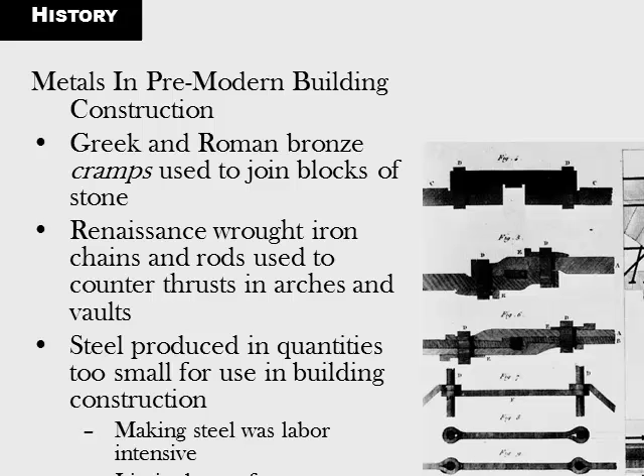Of course, steel is not a modern material. It was used in ancient times, and y'all can read through that. It started wide use, or mass use, in the 1700s. That picture on the bottom right is the Crystal Palace, which is a very famous structure. And then, of course, the Eiffel Tower was done in 1889.

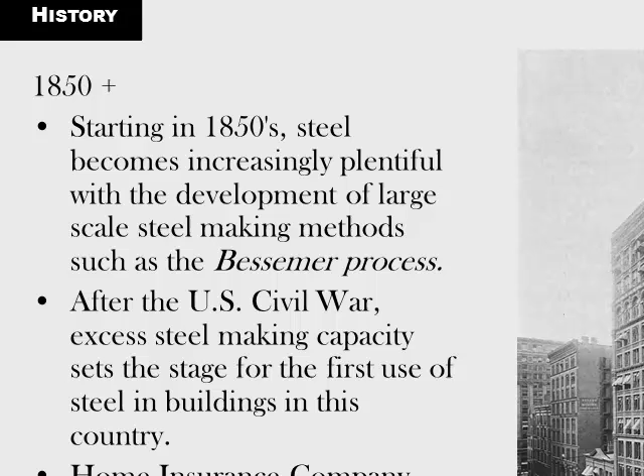With the Bessemer process, that's what made it start being widely used as far as structure. It's one, and then it talks about the modern use. And then it gets into the materials, what's in steel, and the differences between the different types.

You got cast iron, wrought iron, and steel. Cast iron typically is 2 to 4% carbon. Wrought iron has little or no carbon. Strong in tension, but weak in compression. It's easily shaped. Any of you ever seen like cast iron furniture in a yard with the little curly cues and stuff? Or wrought iron, I think that's typically what it is. And that's because it's easily shaped, but it is not very strong.

You'd think you could just beat it with a baseball bat and it'd be fine, but we had some, and in a move it just crumbled because of the weight that the movers stacked on top of it. So it looks strong, but it's not. And then there's steel, which is less than 2% carbon, strong in both tension and compression. You understand the difference between tension and compression? Tension pulls something, compression presses it.

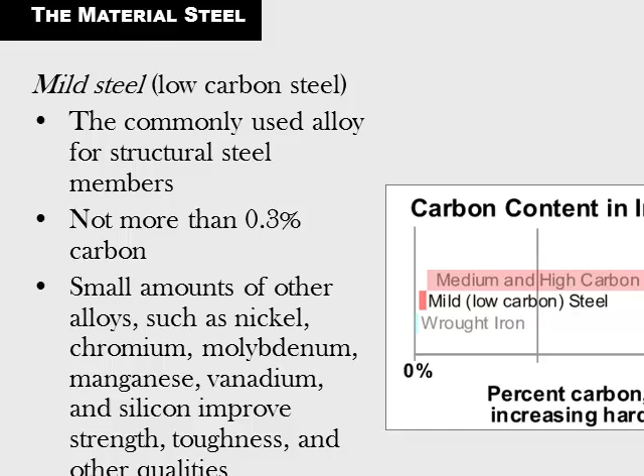The reason steel and concrete work well together is because concrete is very strong in compression and steel is very strong in tension. So together they make a very strong unit, and that's why we reinforce concrete with steel. Talks about other alloys and things in steel. Talks about the process of how it's made.

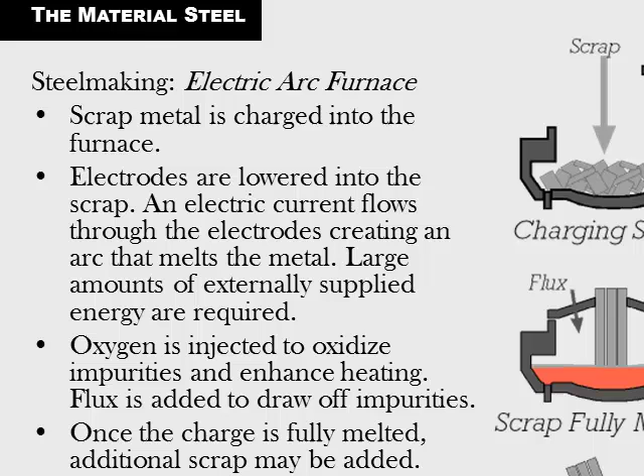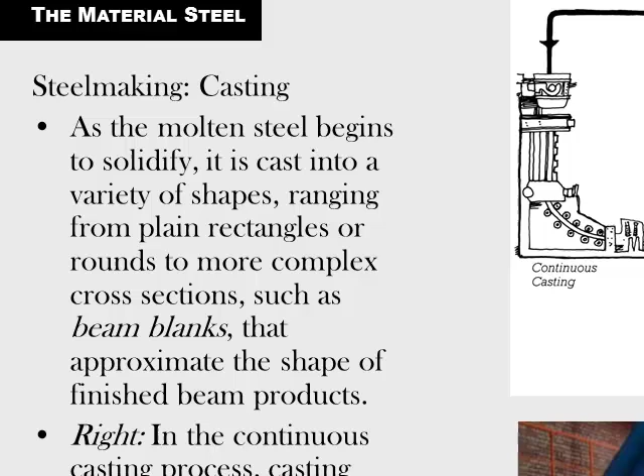And a little chart that shows, like a steel plant. I'm not going to read through all of that. Y'all should have already read, or if you haven't, be sure and read through all these slides. I'm just going to find the parts that are architecturally interesting. That's just a picture of a steel plant. There's piles of steel like they would pile lumber, piles of steel materials. Then how they cast it, the process. Okay, this is important.

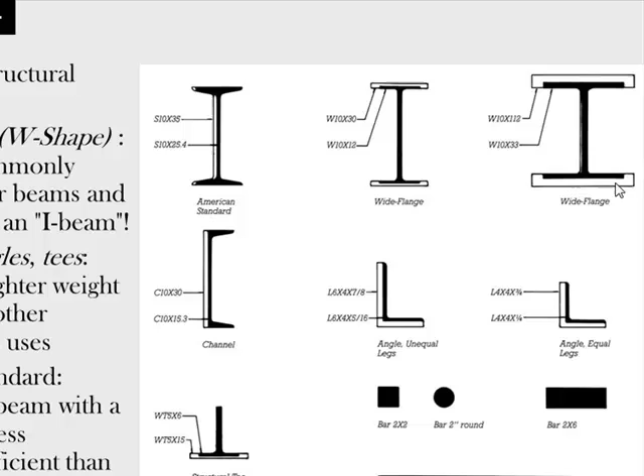It's the shapes, and as you work through architecture or structures, you're going to learn more and more about these different steel shapes. The wide flange, or a W shape, is the most commonly used for beams. It's not an I-beam. It's a wide flanged beam. Channels are, and these are the shapes. You can see that they begin with a W. 10 by 30. We'll get into what those mean in a minute. But what they're showing you here is the black part is a 10 by 12, and the white outline is how much bigger a W10 by 30 is. And here, like a 10 by 33, and then this is a 10 by 112.

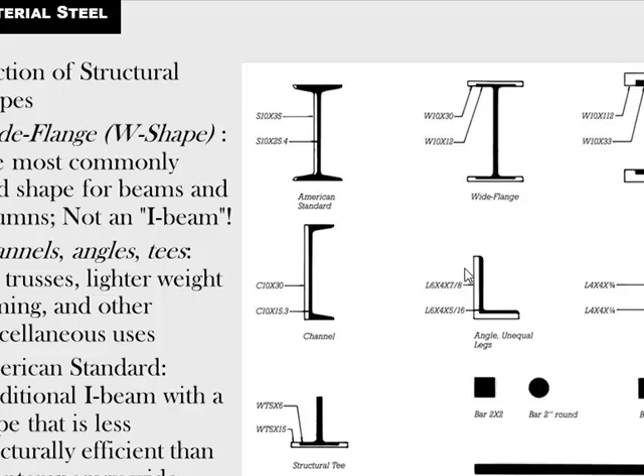So then you got channels. You can remember that because it's like a C shape. You got angles, and C shapes have a C in front of them. Angles have an L in front of them. And then you got T shapes, which are really these up here cut in half. So it's a WT because it's made from a W, but it's a structural T. So you need to be familiar with those kinds of shapes. And then you also got bars that are square, bars that are round. You got rectangles, and plates, which are solid steel. Might be a 1/2 inch thick by 12 inch by 12 inch plate.

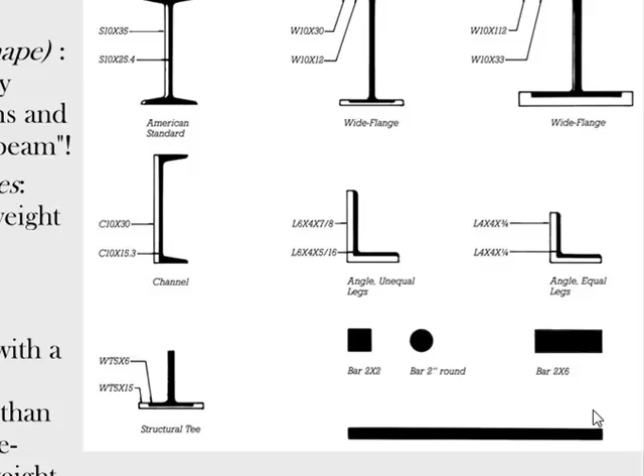So here's the nomenclature for what the numbers mean. W, of course, is the wide flange shape. 10, it's nominally 10 inches deep. Nominally meaning it's not exactly that, but that's what they call it. So from top to bottom is roughly 10 inches. The 30 or the 12 means pounds per linear foot. So if you have a beam that's 10 pounds per linear foot and a foot long, it's going to weigh 10 pounds. If it's 2 feet long, how much is it going to weigh? 20 pounds, because it's 10 pounds per linear foot. And they're all 10 inches deep.

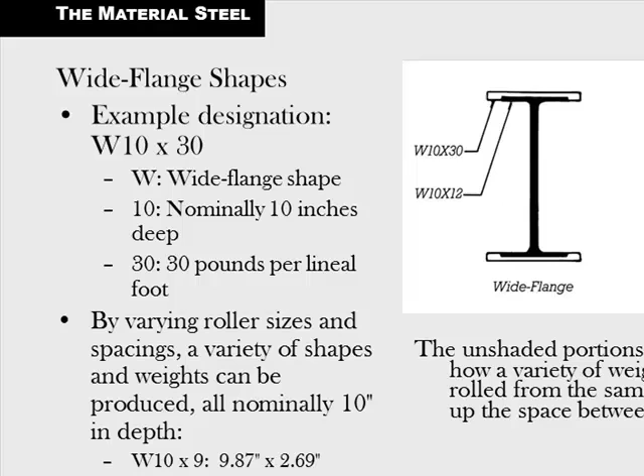So you can see why the W10 by 30, which weighs 30 pounds per linear foot, is fatter, because you can see the outline of it, than the W10 by 12, which only weighs 12 pounds per linear foot, because it has more steel in it. Correct? So that's what you need to remember on those. And then it talks about the roller sizes, spacing, and variety of shapes and weights that can be produced, all nominally 10 inches deep, and it shows the exact dimensions here.

And in the Manual of Steel Construction, if you're ever drawing details, which we're doing in a later class of mine, you need to know these dimensions so that you can draw the details correctly, because every inch counts when you're trying to fit a beam up in a ceiling, and you need to know where everything else goes, and you have to be able to draw the correct dimensions. Here's a picture of some wide flanges coming together, how they're connected, how they intersect.

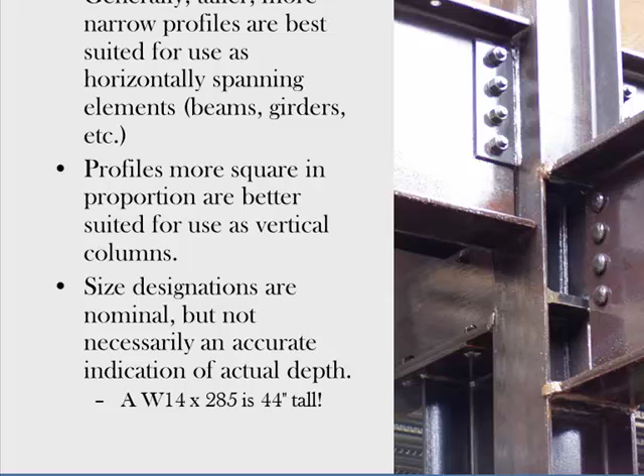Here's a picture of what I was talking about from the steel manual. The steel manual is about that thick, and this is just a page from it. But it has a legend, and you're probably going to have to look up some of these for some of your problems. And I think there's pages in the book from it. But you can see, it talks about all these dimensions here, and you can see where those apply

up here. So, just on the top line, the W12 by 336 has an area of 98.8 square inches. The little d is 16.82 inches, or 16 7/8. I can't read that very well, but I think that's what that means. So from there to there is 16.82. The TW, which is right here, I think, it's really unclear, that picture, or maybe it's this one right here. I think it's that one. Is 1.75.

The width, BF, this dimension here, is 13.385. The thickness, TF, or maybe that's TF right there. You can probably see it better in your book. But you see how that corresponds. So if somebody says, draw me one of those, you can look in your steel manual and you can know exactly how to draw it, because all the dimensions are right there.

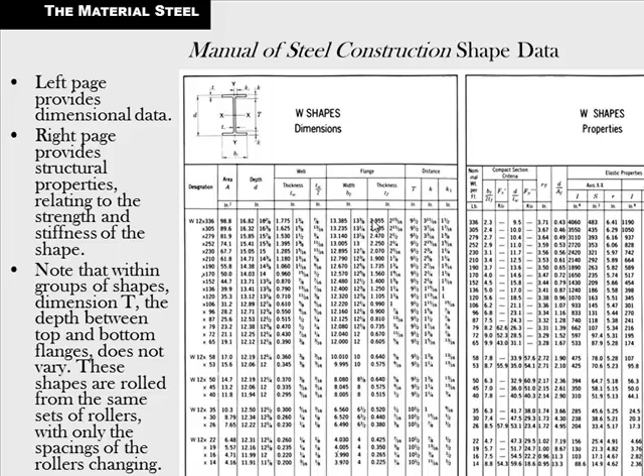There's some other shapes. The S18, the S shapes are standard shapes. They're similar to the W shapes, but you can see they're a little bit different. They're more slender. Yeah, you can remember the S that way. The M is miscellaneous, the miscellaneous channel, and then American Standard channels, and so forth.

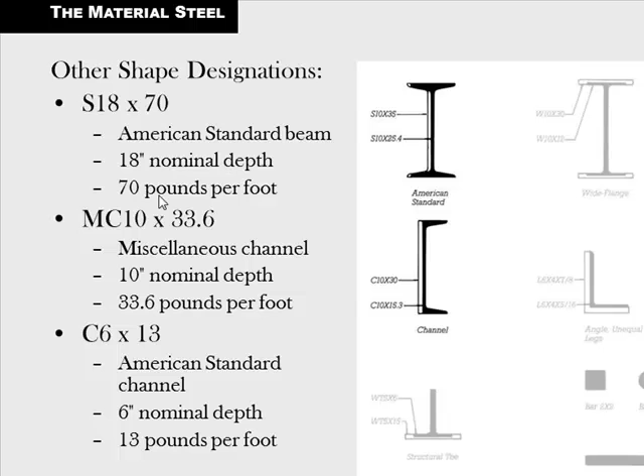So it's talking about, let me go back here, how do you tell? It's talking about the numbers here on how do you tell what they are. So like an S18 by 70 is 18 inches deep, 70 pounds per foot. So just like the W's, the channels, 10 inches deep, 33.6 pounds per foot, 6 inches deep, 13 pounds per foot. So it's the depth and the weight per foot, linear foot.

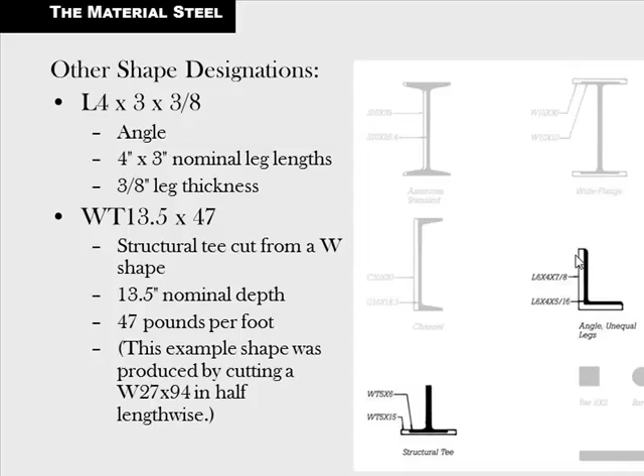And the angles are a little different. You got an L4 by 3 by 3/8, so that means the nominal leg lengths are 4 inches right there and 3 inches. And then the thickness, from that side to side, is going to be 3/8 of an inch. A structural T, nominal depth is 13.5, and it's the same as the others, 47 pounds per foot.

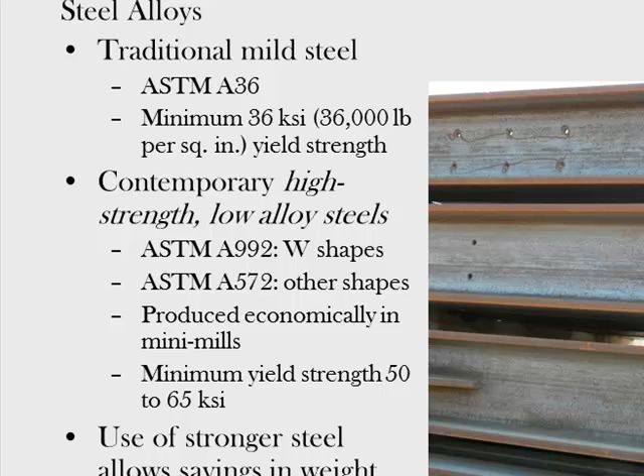Then it talks about the alloys again and stuff like that. Weathering steel, a lot of times once steel develops a layer of rust, that actually makes it stronger. So you might see old bridges with rust on them, but they're meant to be that way because that protects them and it makes the material stronger. Stainless steel, of course, has an alloy in it that keeps it from rusting, and you use that when you don't want rust, like on docks and things, you don't want that to eat through your nails and your bolts.

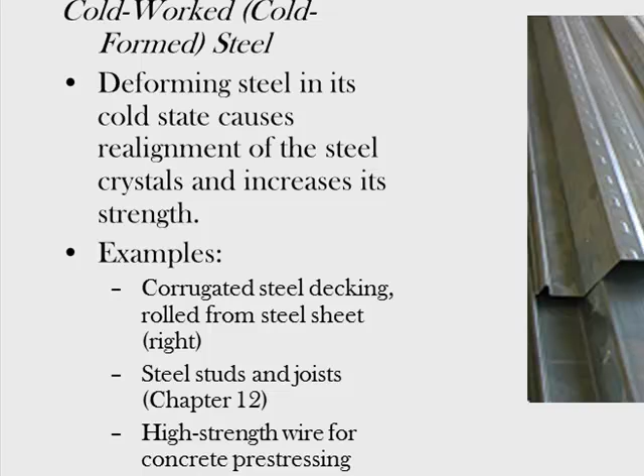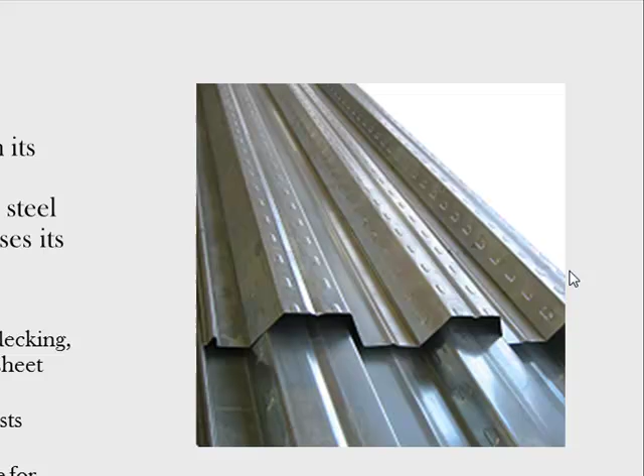Cold formed steel is what we use, like that looks like a decking material. This is a corrugated steel decking, it says, and it's a sheet, and then it's formed into these shapes, and then you would pour concrete on it, and it makes a steel concrete deck. You can also make steel studs and joists, which we'll get into later.

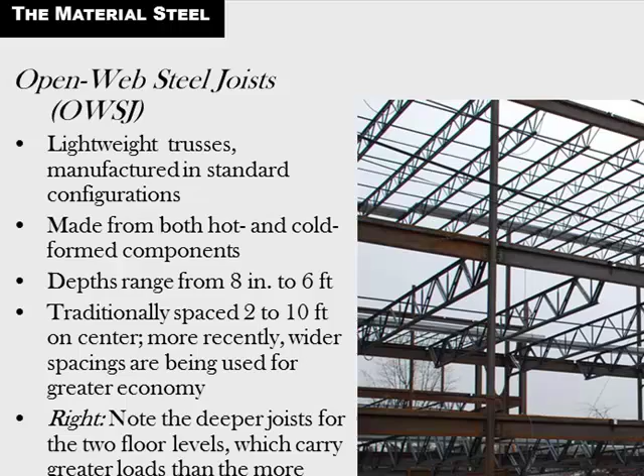Then there's joists, just like with wood. You got open web steel joists, which are much stronger and lighter than if you just had a solid steel member. So that's why we use those, because it's much more efficient. And you can run wires and ductwork a lot of times through those openings in the joist and have a smaller ceiling space.

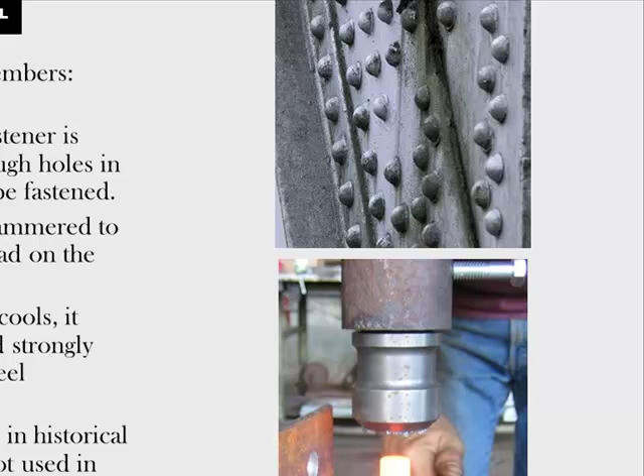Riveting is how they used to put it together, with rivets, but that's not used as much anymore. Nowadays we use more welding and bolting. It's welded usually in the shop. Sometimes it's field welded, but most times I think they try to do most of the welding in the shop where they can control the circumstances, and then in the field they will bolt what's left that needs to be bolted together.

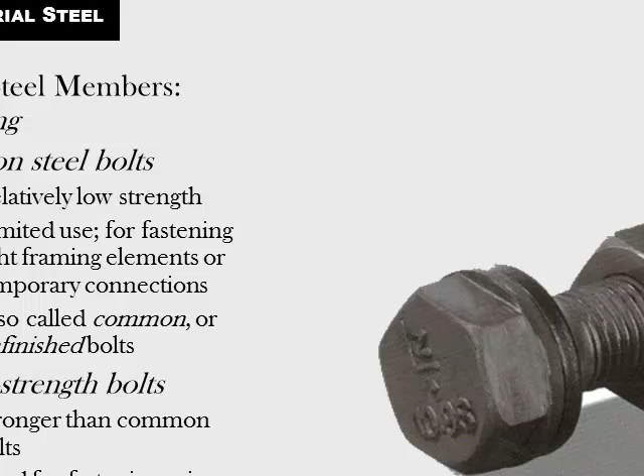Here's some bolts. They're talking about different types of bolts and what you might need them for. Another thing to remember, I think it talks about somewhere in here, is using the same type of steel. I'm sure we'll get to it, so I won't belabor that, but if you're using stainless steel, you want to use stainless steel connectors, because different types of steel will tend to corrode each other if they're touching.

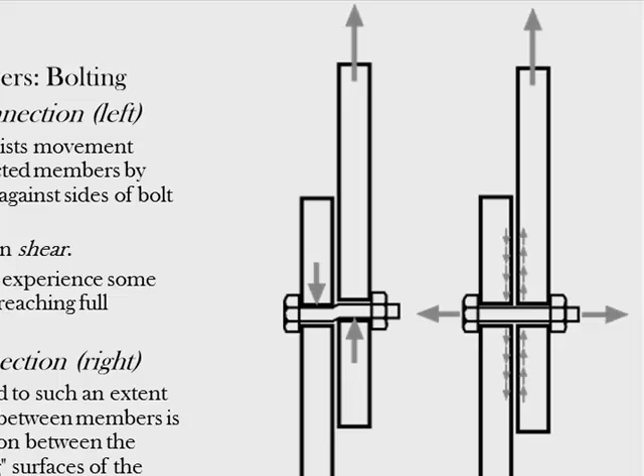So it talks about the connection here, slip critical connection. You don't want these to slip past each other, so you have to have a bolt that is tensioned to such an extent that the movement between the members is resisted by the friction. And all of this generally is decided by the engineer, but you just need to be familiar with these terms as an architect so that you can have an intelligent conversation.

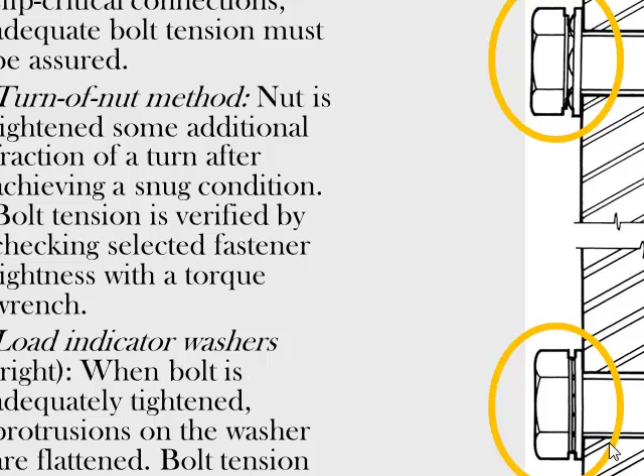Turn of the nut method is a way they use it. See these little bumps? Once those get flat, you've tightened it enough. That's a load indicator washer. They also have these other types, tension control bolts.

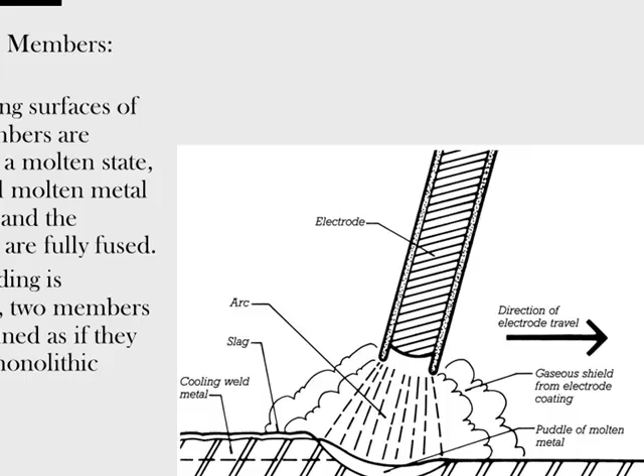Then they talk about welding. There's lots of different types of welds that, if you do become an architect, you need to be very familiar with. It's on your structures exam, but it talks about the different terminologies. There's the arc, the slag is what they put in there, puddle of molten metal, direction of the electrode travel. It's all too scientific for me. But this is what architects need to know, is the shapes of and why you would use different welds.

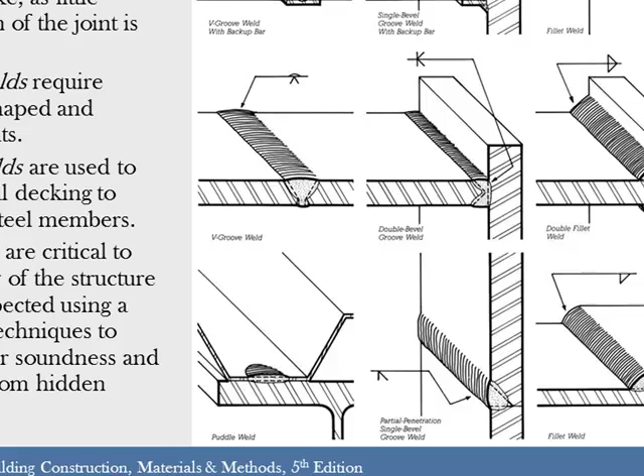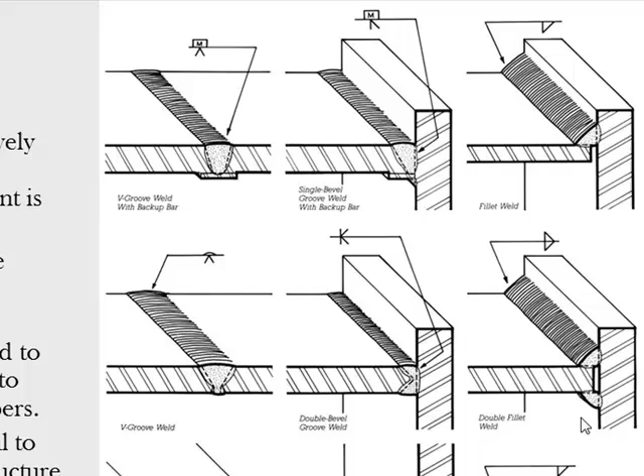You got the V groove weld, which is obvious because it's a V. You got the single bevel. You got the fillet weld, which makes a fillet. You got the double bevel. You got the double fillet. You got the puddle weld, looks like a puddle, and so forth. And these are the weld symbols, and we're studying this in one of my other classes on how you draw these and what the different symbols mean, because they all have a significance to the welder, so they know exactly how to do the weld.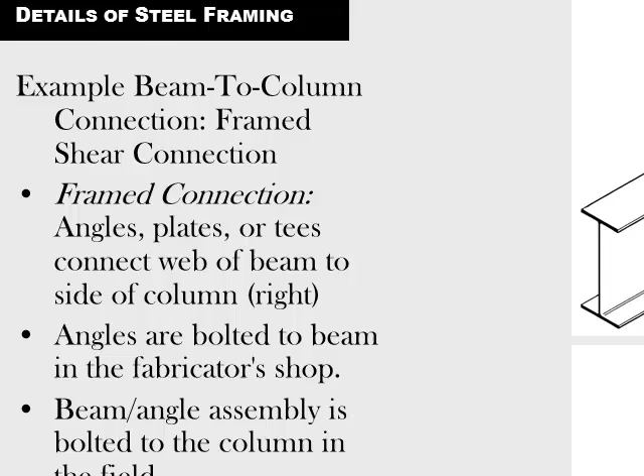Okay. Details of steel framing. Here's where you can draw me stuff to get extra credit, so that you understand how steel frames are put together. This, of course, is a bolted connection. You have angles. There's holes pre-drilled into the beams, and then you bolt these angles on there. You slide this in there, and it goes in that little groove, and then you bolt them on. That's one way to do it.

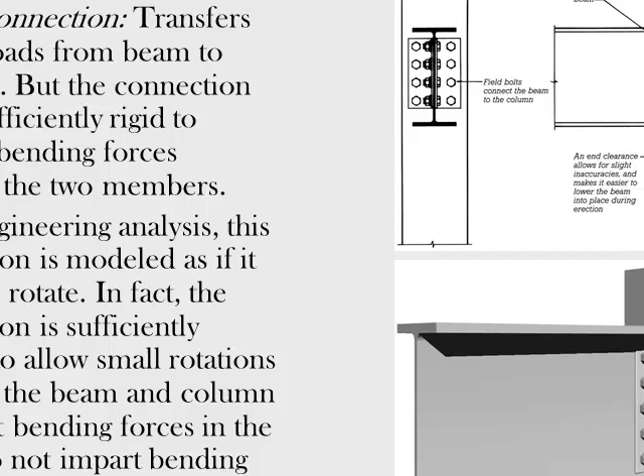It talks about shear connection: it transfers the gravity load from the beam to the columns, but the connection is not sufficiently rigid to transfer bending forces. We talk about shear and bending forces. Shear is the tendency for something to slip past each other. Like this is a shear connection, because if there's enough weight put on it, this will just break off and slide down. Bending would just cause it to rotate or bend. And you design different connections for different forces that joint is going to withstand.

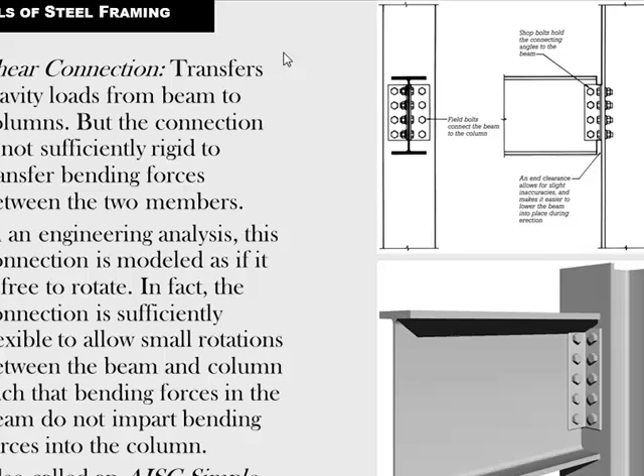So they're saying that here the shear connection just transfers gravity loads from beam to column, but the connection is not rigid, meaning it's not stiff enough to transfer bending forces. So this could possibly twist and deform somehow if it doesn't have another type of connection or part of it that would keep it from bending. These are shear tabs right here. They're welded to the column and then bolted to these beams.

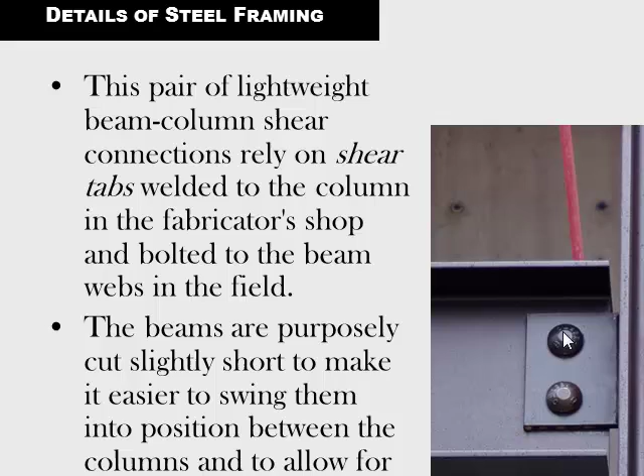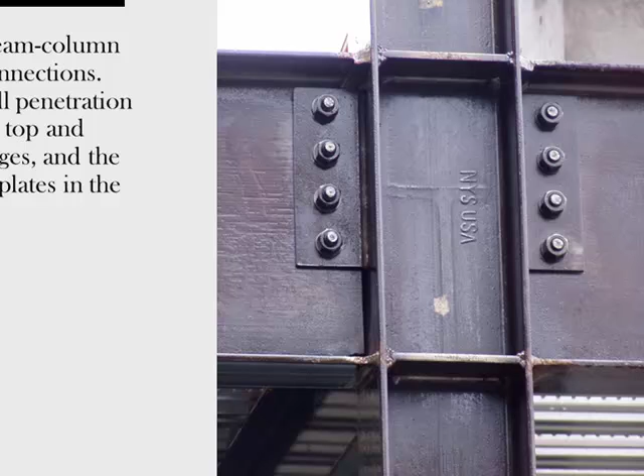They talk about other connections, the dog bone. Here's a column with moment connections, because you can see how it's welded on the flanges. You can see the welds.

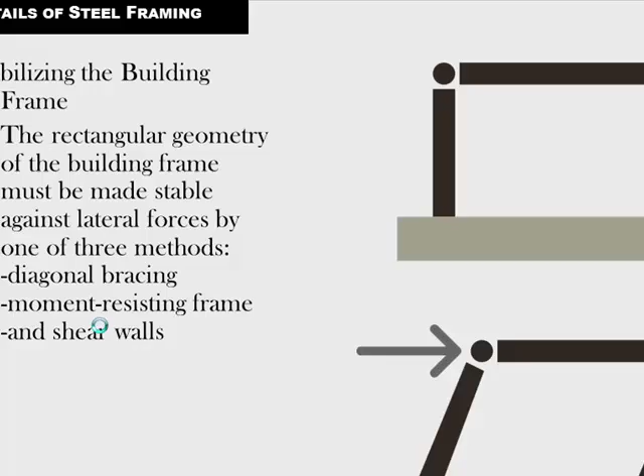When we design buildings, we need to have them stable against wind, against earthquake, against gravity, and whatever trucks running into them, whatever. So this is just a simple picture of how the rectangular geometry of the building frame must be stable. And so to prevent this from happening, you're going to need diagonal bracing. Why is that rotating? So they put these diagonal braces in the building, and that's the same as in our wood construction. Remember, we put sheathing on the walls, the plywood sheathing.

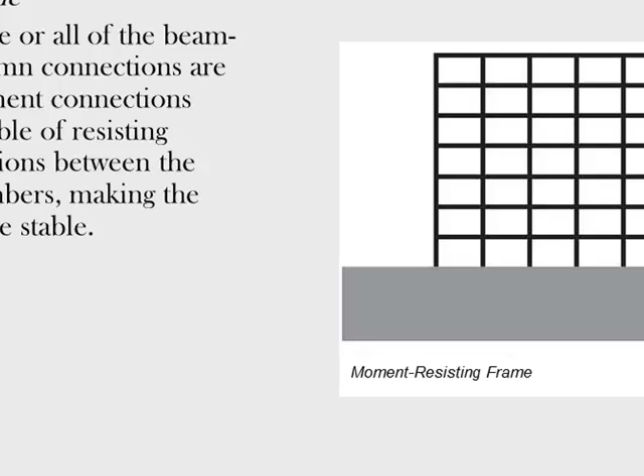You can also have a very stiff frame, a moment resisting frame, where all of these connections are welded and bolted so that they're all just extremely stiff, and then that's a way to resist the... see, these connections aren't as stiff by the way they've shown those. These are all just solid, so they won't go anywhere. But that's probably more expensive. I don't see that done as much. Here to talk about a shear wall, you can just make a solid panel. That does the same thing.

A lot of times in buildings, you'll have what's called the core in high-rise buildings, and that's usually where the elevator is, and in the middle, the inside, that's going to be your shear component for that building, because it's all solid walls. You might notice that every tall building has that.

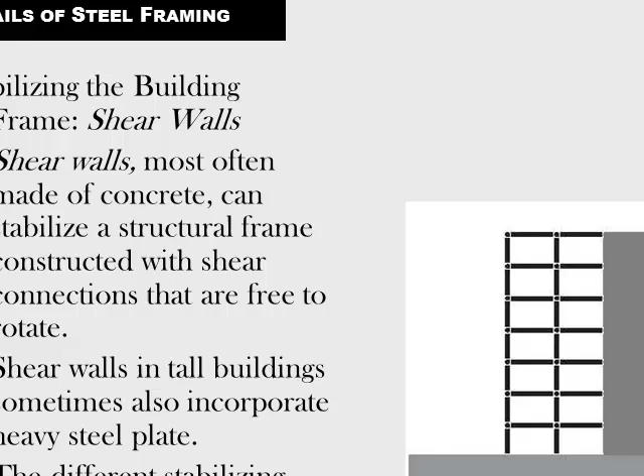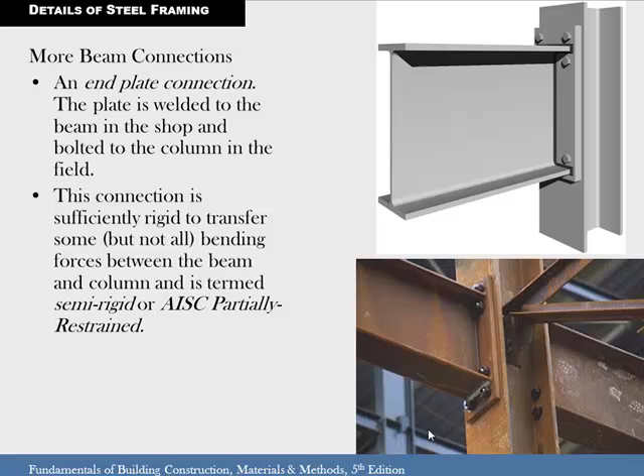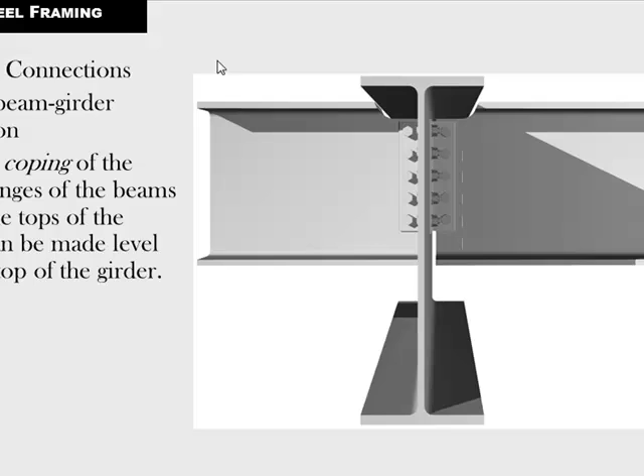Beam to girder. A girder is typically bigger than a beam, so this would be your girder, and then your beams are going to lock into that. And they have to be coped, which is that term right there, where they cut them down, because you're probably going to have a floor on top of this, so you don't want a big bump in your floor, so the top of these beams have to be at the same level as the top of the girder.

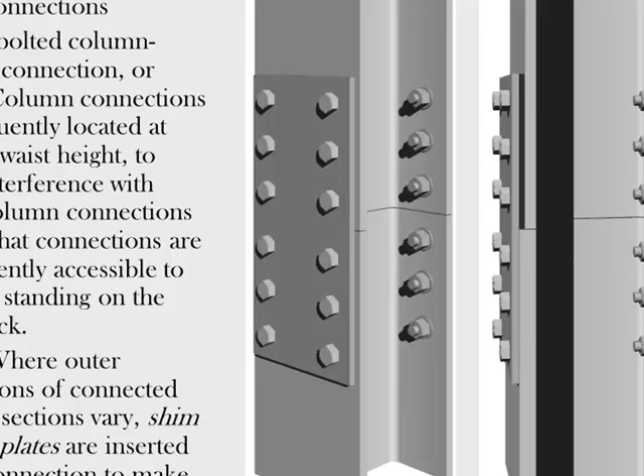Sometimes you need to splice columns, and that doesn't make them any less strong, but you just have to do it right. For instance, if you're going up in a high-rise building, you might not need the same size column on the fourth floor as you do on the first floor, because you're not holding up as much weight. So here they've got a stronger column in this case, and then they're going to shift down to a thinner column. So they have some filler material, and then it's all bolted together.

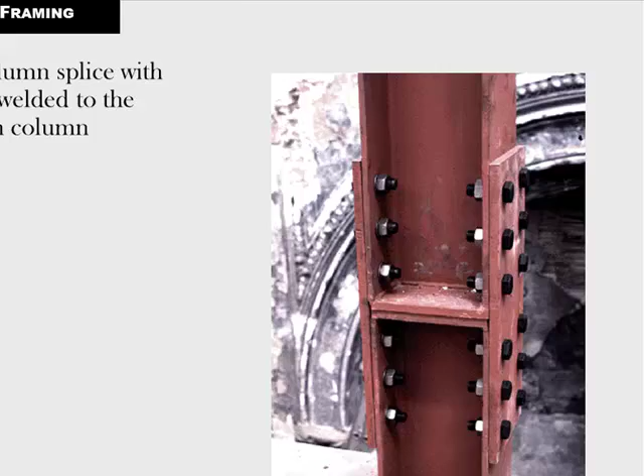You can see one in real life. There's another way to do it. You can put a plate on top, and then the angles. Like I said, y'all can read through all that.

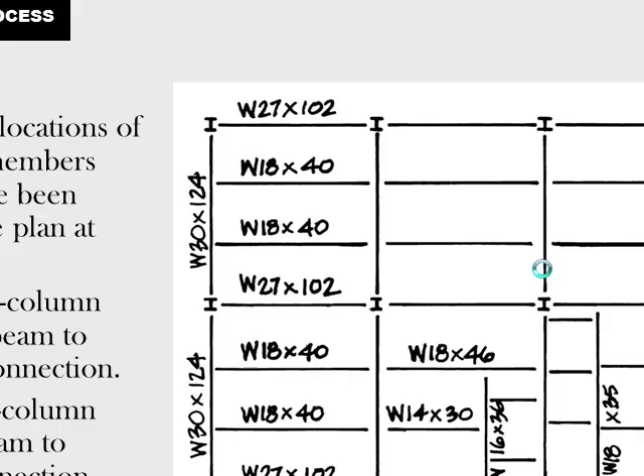So when you frame with steel, it's similar to what you do with wood. You're looking down. This is a plan view. You're looking down on this right now. And these, you're cutting through your columns. So all these W shapes are your columns in the building. Then you're going to have some girders probably on the outside, and these are probably girders here. And then you're going to have beams supporting your floor.

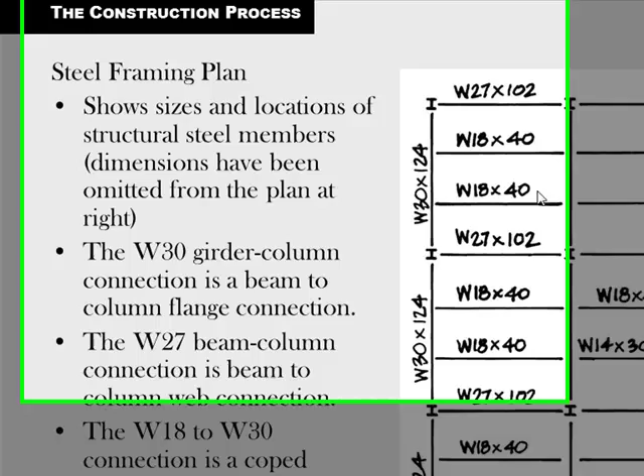And your engineer, or out of that AISC manual, will tell you how much these items can carry based on the weight of your building, what's going to be in there, the loads, and then they'll decide what size that needs to be, and how far apart these need to be. So we've got a W27, which means it's 27 inches deep, and it's 102 pounds per linear foot. So that's a heavy girder. I would call that a girder that goes around the outside.

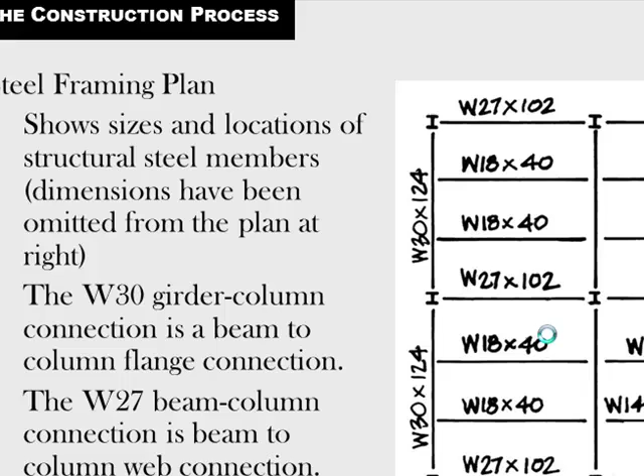And then you got your beams, W18, it's only 18 inches deep, 40 pounds per foot. And then this one's a little bit heavier because it goes from column to column. So that's how that would be a floor framing plan on a building.

This is a drawing you might see from the shop. There's several stages. The architect designs the building, then the engineer designs the structure, and then once it starts to be built, you get shop drawings. And those are more detailed.

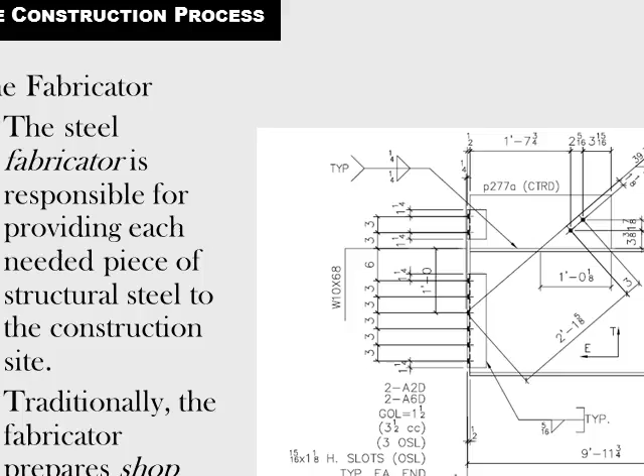Whoever's manufacturing the steel pieces will draw them up first, and then they'll send them back to the engineer and the architect to make sure that that is what we want, and that all of these connections, the holes that are going to be drilled, are all in the correct place, because once you get it out to the field, you don't want to have to drill a hole in a piece of steel that's 2 inches thick.

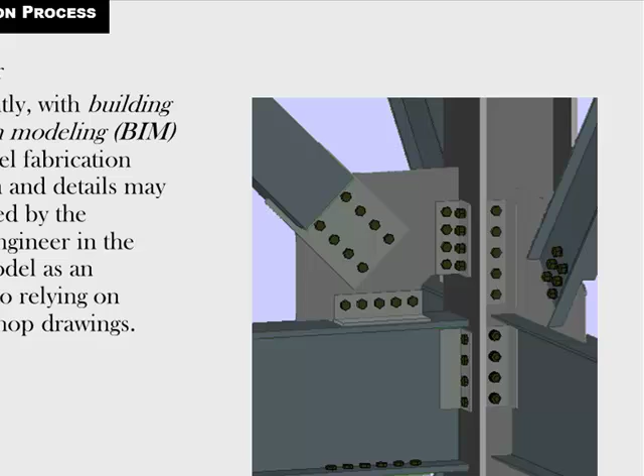So one thing you got to do, when the steel comes to the site, it's all labeled like this. And the architect and engineer, once the steel is delivered, have to go out and check their drawings, check the shop drawings, and make sure all the pieces are there. It's basically counting all the pieces.

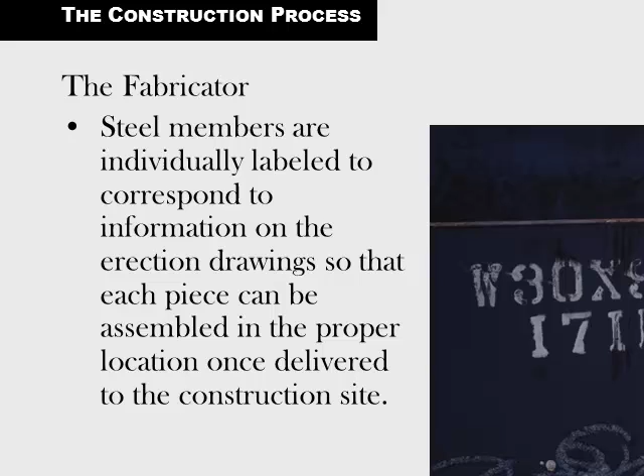So that's a pretty boring job. I've done that. It's something that has to be done, because if something's missing, you want to catch it now rather than later. The erector is the person that puts the steel together on the job.

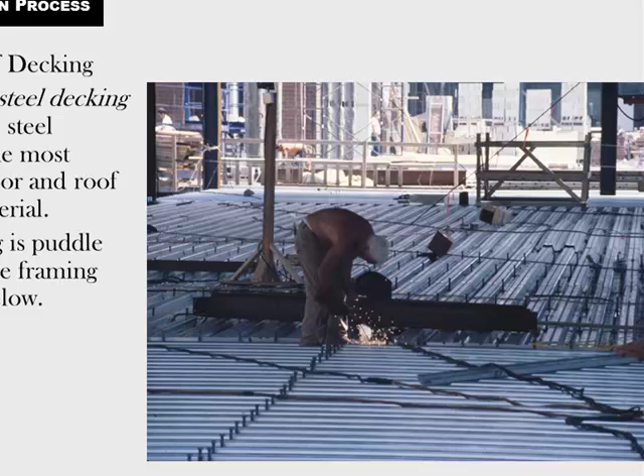Here they're using, remember we saw that corrugated decking, cold formed steel before. This is what that is. They're laying that down, and they're welding it to the little studs that are sticking up here. And that will help bind it to the concrete that's going to be poured on top of it.

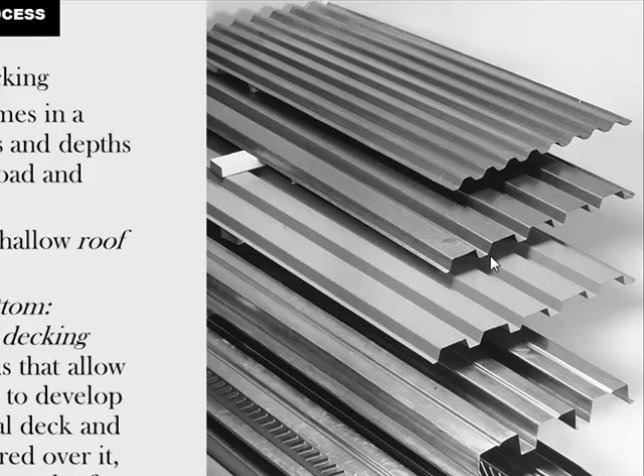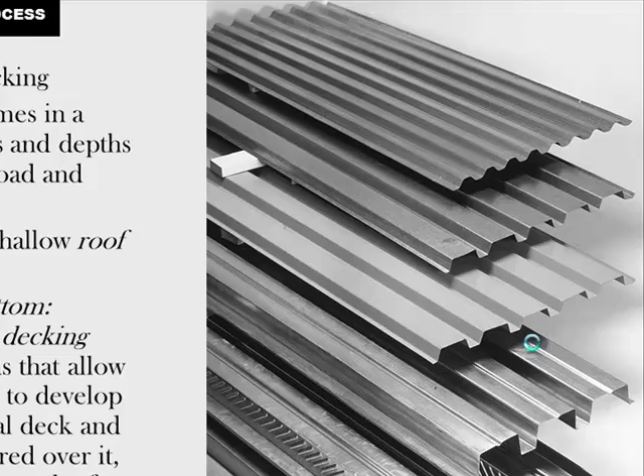Here's some examples of floor and roof decking. These ribs make it stronger, and you don't obviously need as much concrete because the concrete won't go down there. So it's lighter, stronger; once the two elements are bonded together, the concrete and the steel, it makes a very strong deck. Plus, this allows you, again, to run electrical or small plumbing pipes in those little ridges.

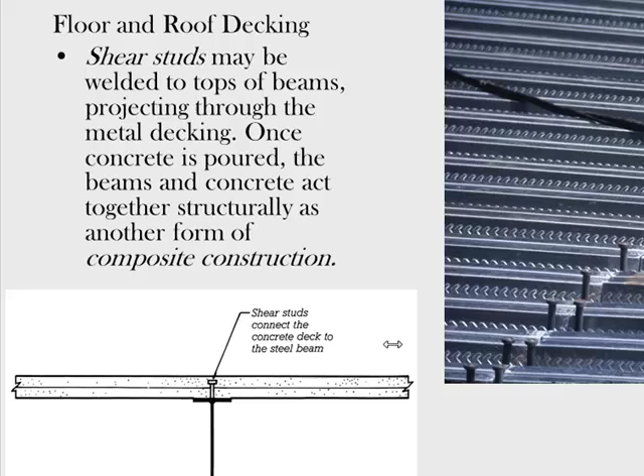and then your concrete is going to go another probably 2 inches on top of that. So you have a 4-inch concrete deck overall. So that's what that detail would look like of how that's formed. Here they're pouring the concrete. They also, in this case, have a welded wire mesh that also reinforces the concrete.

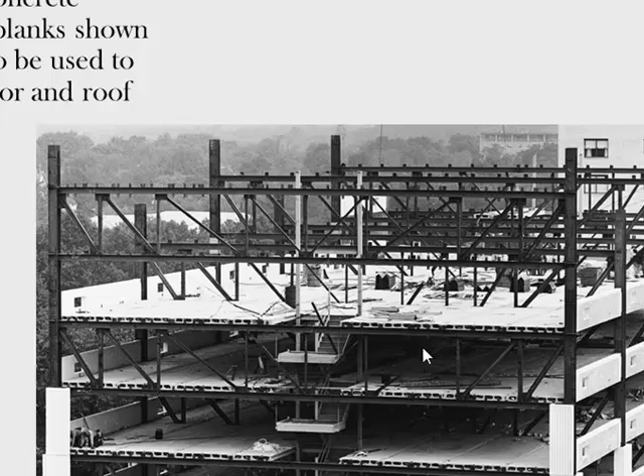And here you can see they have some precast panels and precast floor panels on this one. So you think that steel is fireproof, but it's not. It melts when it gets to a certain temperature, and that's what happened, of course, to the World Trade Center when the planes hit it. It was so hot that the steel eventually melted and the buildings collapsed. It couldn't hold itself up anymore.

So, especially since then, but even a little bit before then, you have to fireproof your steel and try to make it stand as long as possible in the event of a fire, to give everybody in there enough time to get out before it collapses. So you have to make sure that it's fireproofed. And you can do that with concrete. You can surround your steel in concrete or plaster, gypsum wallboard. There's also spray insulations, different ways to do it.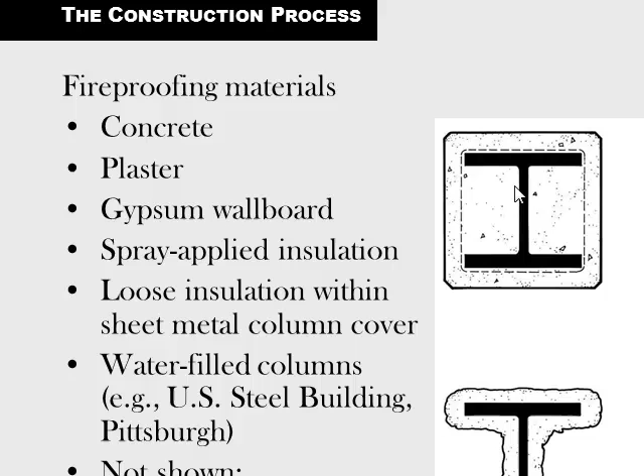See that in the back corner there is a column, and that's covered. It probably looks kind of like this detail here. It's got gypsum wallboard all around it, so that it just fits in with the wall, basically. That's how it's normally done in small office type buildings.

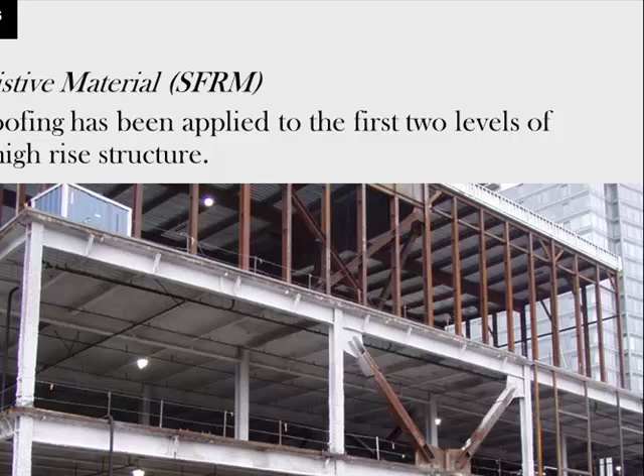Here you can see some fireproofing that has been sprayed on to the ceiling. And then they're spraying some in here on these things as well before they cover it up. There's some more fireproofing.

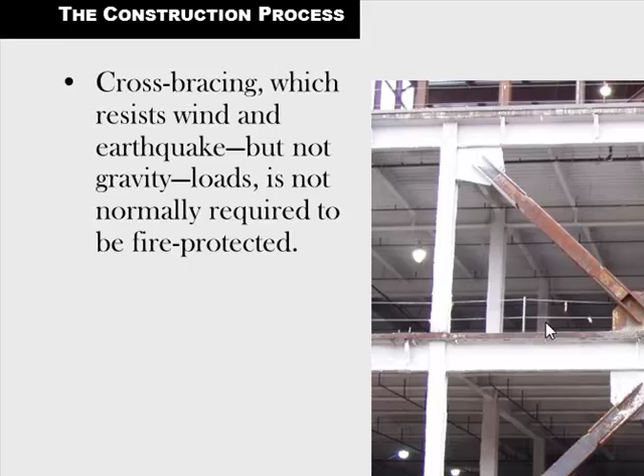Notice that the cross bracing does not have to be fire protected. That protects against wind and shear loads like earthquakes and wind loads, not gravity loads. You want the fire protection on gravity loads so that it doesn't collapse and fall down. So if these melted, the building would not fall down. But if these columns melted, of course the building would fall down. That's the end of that.

Okay. So this copy machine, I messed up making the copies, but let's see. Pages aren't exactly in order.

And so first I'm going to draw, just so that I can be on the same page as y'all, a center line. The center line is going to be the center of the beam. Why is it red? Oh well. That didn't show up very well. Yeah, that's better. Okay, there's my center line. Now I'm going to go to black to draw, a little thinner. So you got your center line, which has that CL there, and then you also have the bottom where they want you to start. So I'm just going to draw that. So I'll make my lines straight.

So the first thing we need to see is a W12 by 22, looking on this chart, how tall is that going to be? If you look at the picture at the top, there's a dimension with a little d. Anybody got a good guess? Chart's on page 422.

And you got a picture of what all these columns mean as arranged by the picture at the top of the chart. So you have a little d, which is the total depth. So is there a column there that has a little d on it? Huh? Come on, people.

12.31 or 12 1/4 inch. So if each square is 1 inch, I'm going to count up 12. 1, 2, 3, 4, 5, 6, 7, 8, 9, 10, 11, 12. It's 12 1/4, so it's going to be just a little bit higher. That's where the top is going to be. So I'm just going to draw that roughly. So now I know that.

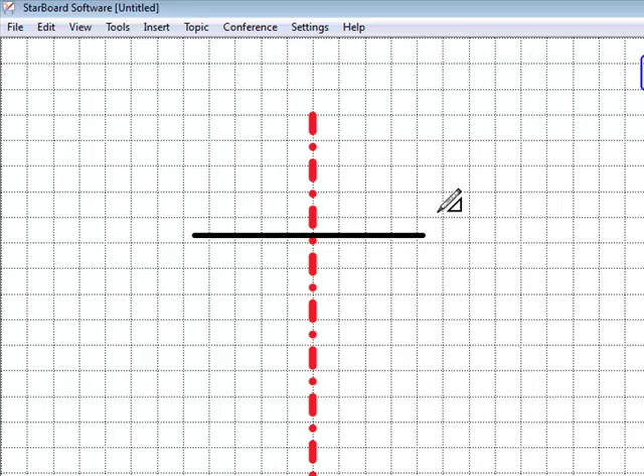So to me, my next dimension would probably be how wide is it going to be? And that looks like it would be the one with the little b, BF, which is width. So if you look over and follow width down to your W12 by 22, how wide is that going to be? 4 inches. So if this is a center line, how far will it be on each side?

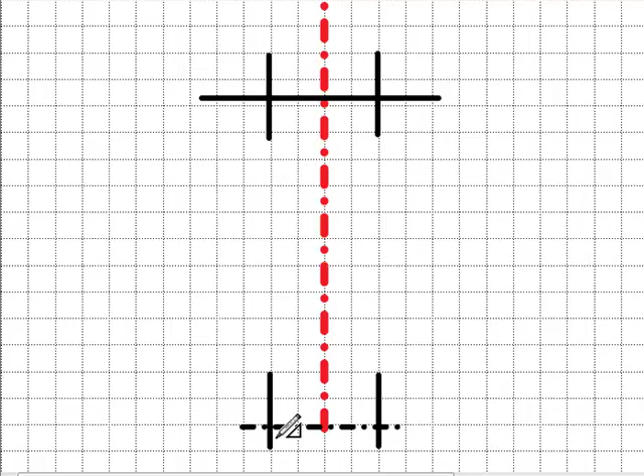2 inches. So just for now, I'm going to draw, so there's 1, 2, so I know it's going to stop there, and it's probably going to stop there on that line, and then it's going to be the same thing down here. I'm just sort of drawing the outline right now, and then I can finish it up. So my beam is going to be contained within this, right?

So now the web, which is the middle section, and that is the TW, the web thickness. So you can see up there, there's the X, and then below it there's the TW, and then in your chart there's the web thickness. So how thick is the web going to be? On the W12 by 22. The web, TW.

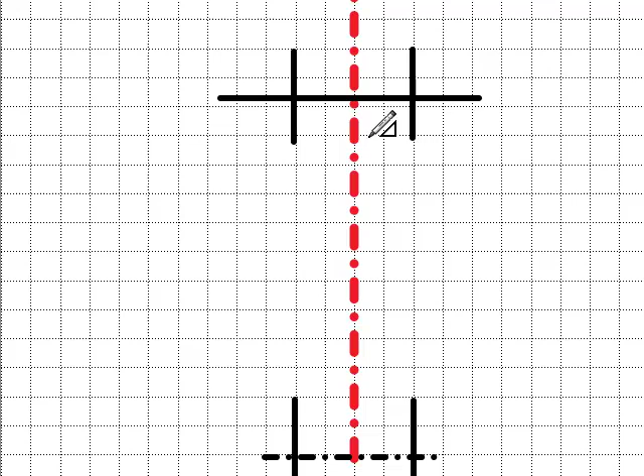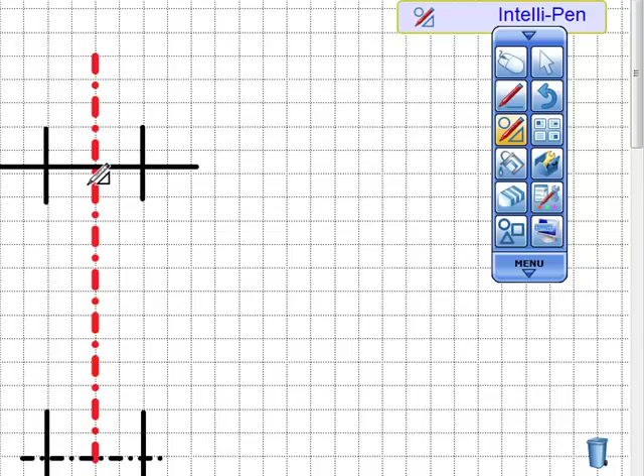Right, or 1/4 inch. So it's going to be 1/8 inch to each side of my center line. Of course, your lines won't be as fat as mine here, so just draw it as close as you can. It's hard for me to do it, oops, because it's going to grab to that. Let me see. Make this a little thinner. I can't draw good on this thing, obviously. Try it again. This line is going to be 1/8 inch or 1/8 square over on each side of that. So that's about as good as I can get it on this program.

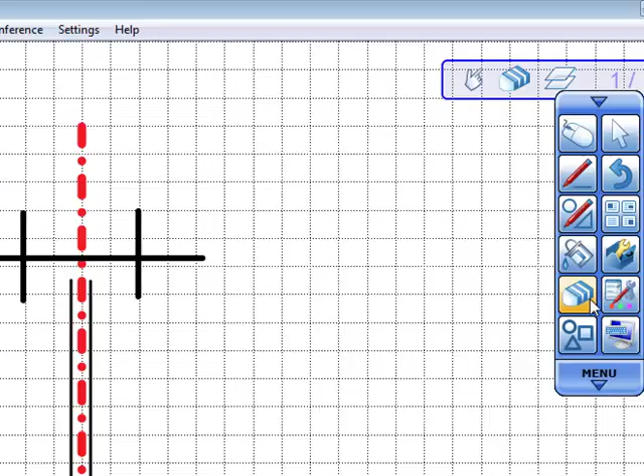You're going to have your bottom line here, so you can go ahead and make that solid. Your top is going to be up here. So you can, why isn't that erasing? Huh. Erase. No. Well, sorry. Moving on. You're going to have a line here. Okay, and you got your bottom here.

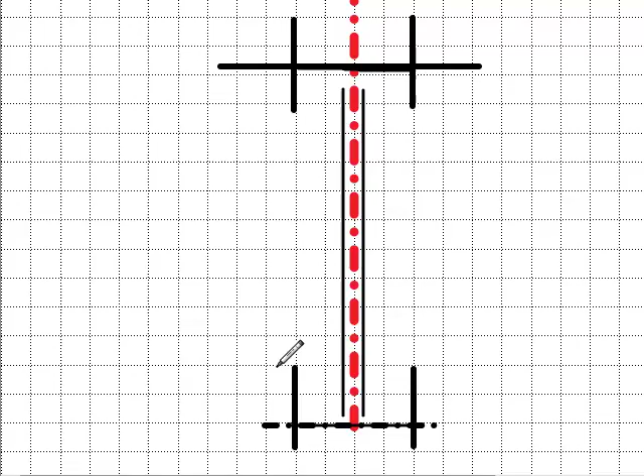And then the next thing you want to know is the TF, which is the flange. I termed that wrong. This is the web thickness right here, and up here you got your flange thickness, and that's the same on the top and the bottom. So up here on your chart it says TF flange thickness. So how thick is that going to be on your W?

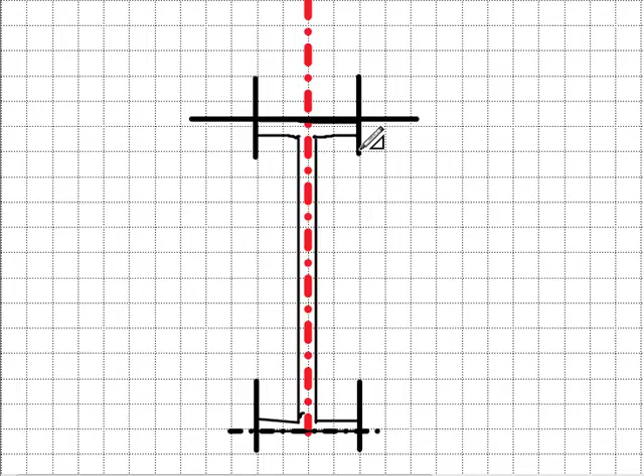0.425 or 7/16. So just draw your best guess at that. That's almost a half an inch. So, probably somewhere down in here. And then it's going to be the same. If these squares are an inch, it's going to be about like that. So that's roughly the shape of your W12 by 22.

So now you need to do the same thing for these other shapes, a W12 by 35, and down here they've got two shapes, a W12 by 65, and then they want you to overlay a W12 by 336. Because remember, it's probably going to be a lot fatter because it weighs more per linear foot. So you can see the difference when you scale that out.

So you're going to finish that, and then on this other sheet, this page with the square on it, don't worry about number 4. I just want you to draw the sections of the angles based on, I think you can find that information on this other chart on page 423. So y'all can work together doing that, and then that'll be what's due. And next time we'll go over chapter 12 and any questions you have for the review.